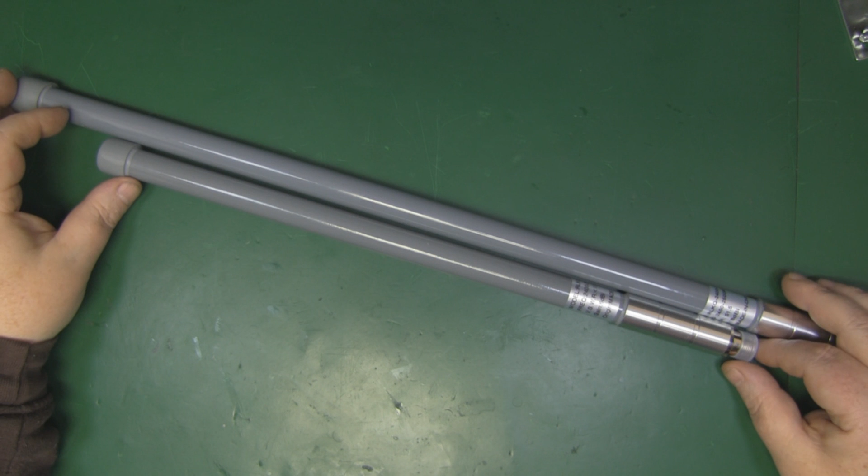So here on the bench, I've got a couple of dipole antennas that I've recently purchased to have a look and test, because I've got a project coming up and I'm going to need quite a few omnidirectional dipole antennas, the type that you can set up outside and not worry about the weather attacking them.

I found these on eBay from a Chinese seller, really a reasonable price. I think the smaller one, which is 6dBi, cost me around £19, and the slightly larger one, 8dBi, cost me around £21. So a very reasonable price. If I were to go to a company like Cisco, they sell dipole antennas very similar to this in dBi and construction, but they can cost well over £100 each.

So I thought it'd be interesting to take a close look at the construction methods they've used, the quality of the construction, and just open them both up to see the difference between a 6dBi dipole and an 8dBi dipole, because there's quite a lot of length difference between the two, the shorter one here and the longer one here.

And you've got this extra length there just to gain an extra 2 dBi in gain. So here's the smaller one, and taking a closer look at the construction, it seems really good quality. You've got the end cap here, and this material feels like fiberglass, not plastic, and you've got plenty of sealant around that top cap, so there's definitely no water going to get into this.

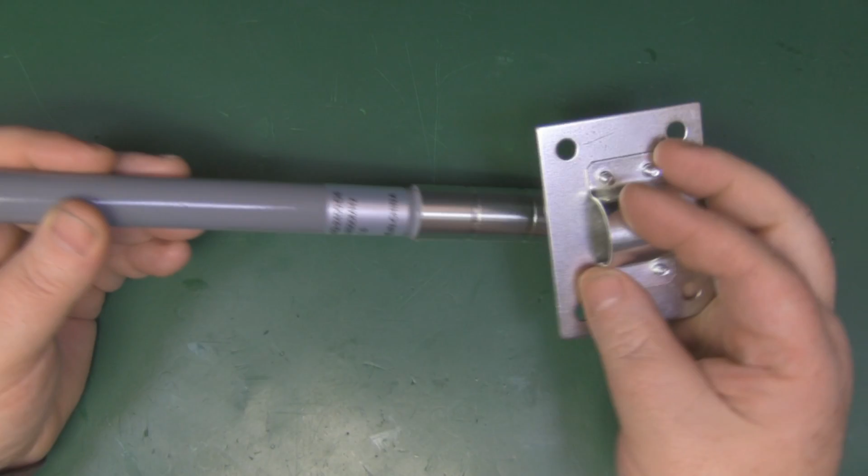And again at the bottom here we've got this metal base, and the clamp goes over that metal base, so you're not putting stresses on this, which I'm presuming is fiberglass or a really tough plastic anyway.

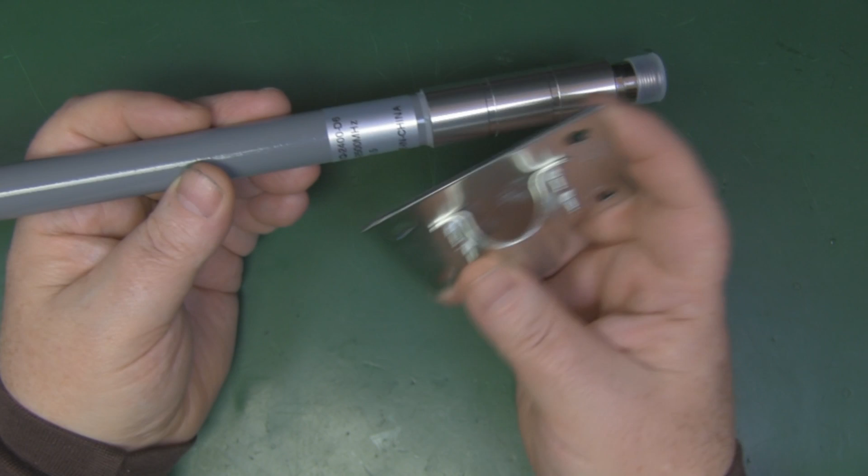So that's designed to go over that, and this will clamp onto either a wall, or I've got some U-bolts with this, it can go on something like a scaffolding pole for instance. But again, the sealant, it's really a nice quality construction there. There's definitely no rain or weathering at all going to penetrate that anytime soon.

And here we've got an N-type connector for the coax, which you will commonly find on professional installations, not SMAs, especially for outside as well.

It's a lot easier to weatherize an N connector than it is an SMA connector, and it looks like it's screwed in, threaded in there, so hopefully I'll be able to get a spanner on there and work it loose so we can pull it out. But there's also some kind of sealant in there as well, so they've gone to the trouble of putting sealant where the threads connect with the N connector, just to make sure there's no water or anything like that going to get in there.

So before I start tearing these down and taking a look on the inside, what I'm going to do is give them a test with the Alfa card just here in the lab, just to see how many access points they pick up, how well they perform with an Alfa card, and we'll have a look at the VSWR as well on the network analyzer.

And the VSWR is printed on the information label on this, and apparently it's a 1.5 VSWR, which is typical for a dipole type antenna.

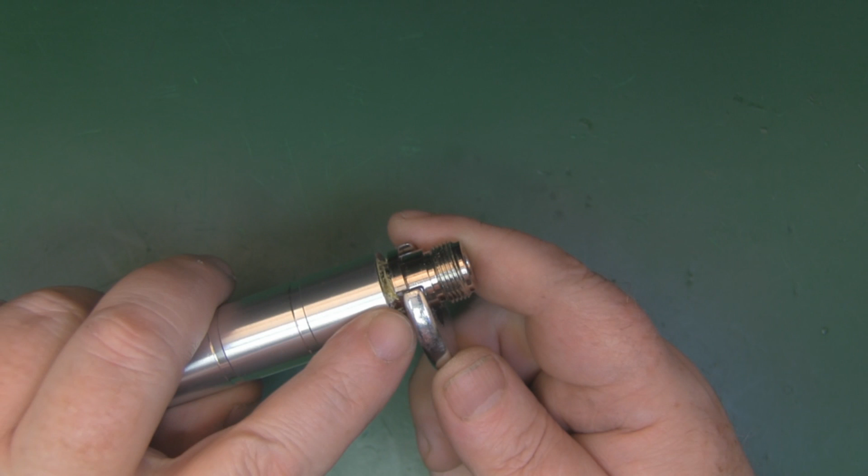So the heat did the trick, so I'm just screwing the rest of it off, but you can see there's some kind of epoxy sealant in there. The heat definitely did the trick on that. That should be good waterproofing as well though.

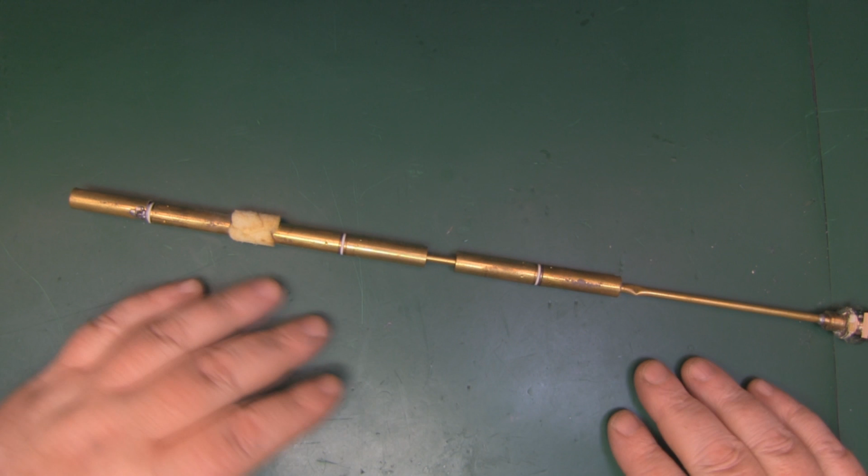So now that we've got it opened up, it's a little bit surprising. I wasn't expecting to find this inside there. It's not your standard dipole design. In fact, it's a collinear design, and you can tell that by these tubes here.

There's a few videos on YouTube, and I've made a couple myself very early on, probably around video number 10, 11 or 12, where you can make a simple collinear antenna just using coax, small sections around 25 to 30mm long, and it's just the way that you arrange them. You can produce a collinear antenna and it will radiate, and it's a pretty effective design as well. So that's what we've got going on here with these brass tubes.

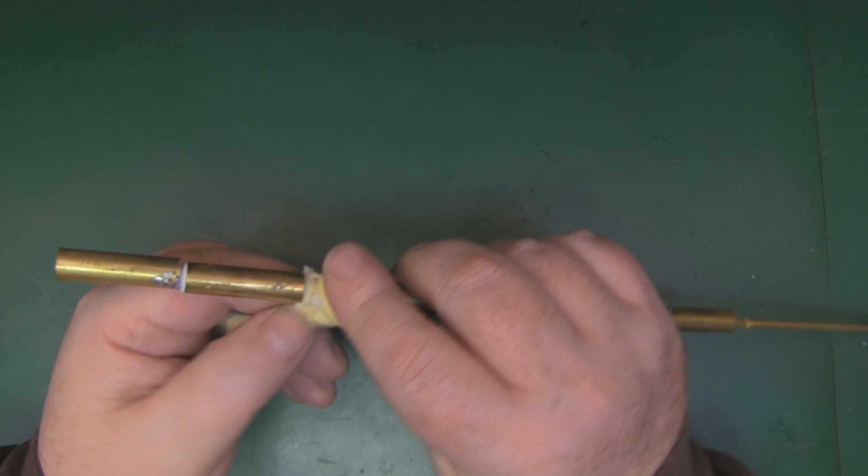So I think the next step is to get the ruler out and start taking some measurements, and I'm just going to remove this packing around here, which is there presumably to stop this rattling against the body of the antenna, but we've got a little tie off there, so I'll just have to cut that away.

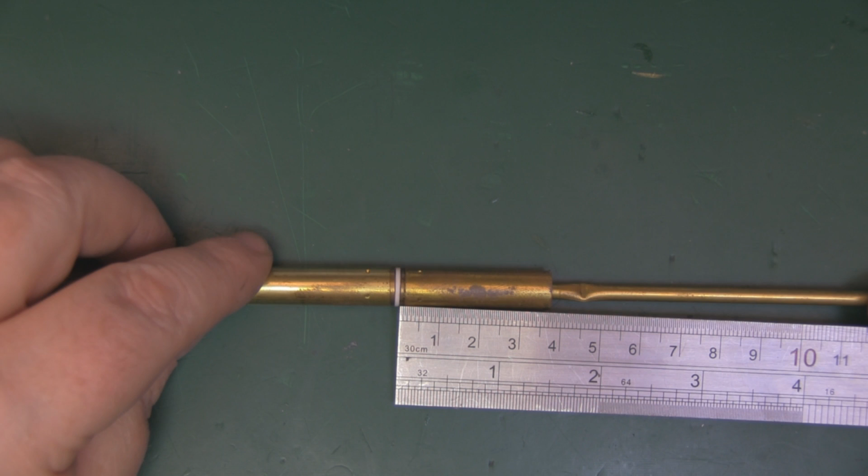So I've measured the tubing with the ruler, and we've got these two here, these two tubes separated by this plastic dielectric in the middle, so they're insulated from each other, and the measurement for these two is coming in at 37mm long, and that's the same with the second two tubes here as well, separated again with this plastic dielectric. But the last two tubes here, these are coming in at 36mm long.

Now I don't know if that's been done on purpose for the design or not, but you can probably see here on the end it's been cut a little bit rough. They haven't put a great deal of effort into cutting the end off there, but these two are definitely 36mm and not 37mm like the other two. So I'm not sure what's going on with the design there.

So what I'm going to do is test this with continuity, just so I can find out which one of these tubes is ground and which one is connected to the signal wire, the center pin wire on the end connector, and then I can draw it out and we can go through the design so I can show you that it is a collinear design.

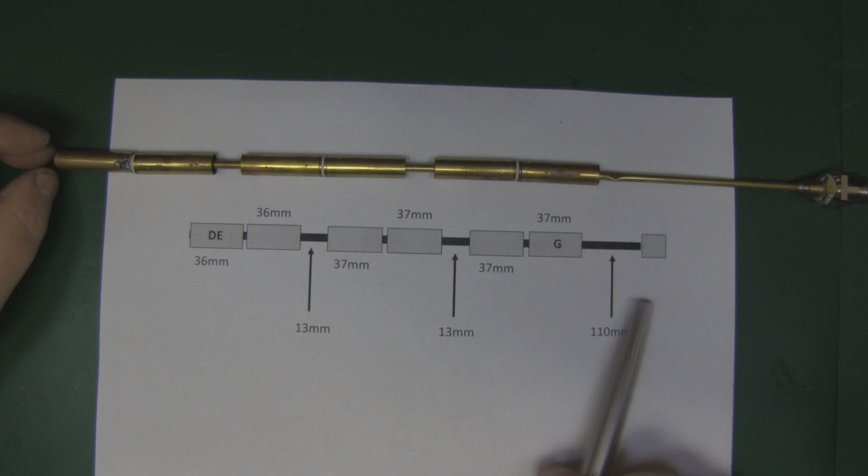So now that I've had time to take a look at this design and try to get an idea of how it works, I've put together this diagram here so you can see more clearly. Basically what we've got is this tube in here, connected to the ground plane, is 110 millimeters long. Now this first section of tubing, the wider tubing, is connected directly to the ground plane on the N-type connector here, so I've put a G there.

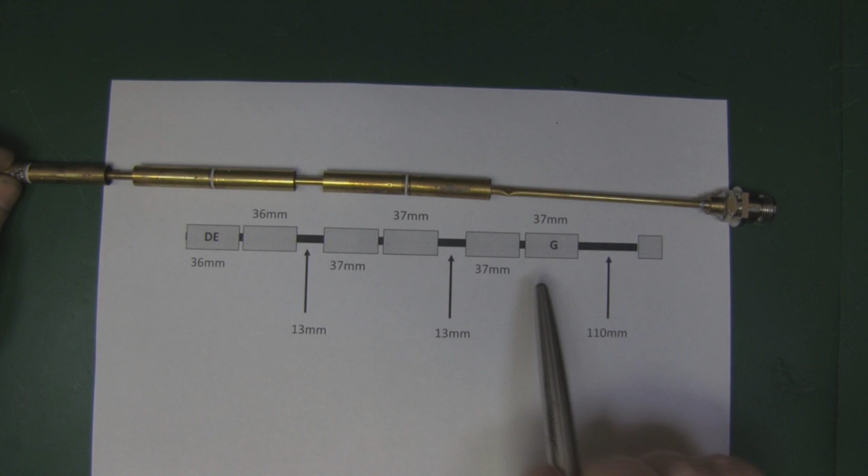Now the next set of these wider tubes are not connected to the ground plane or the driven element, so I can only assume that they're acting a little bit like a parasitic element on a Yagi, for instance. And then the last one here at the end, that is connected directly to the driven element.

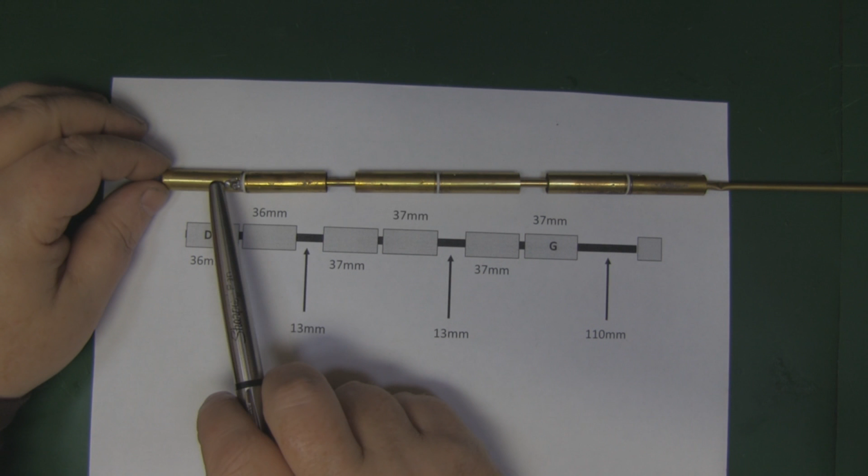That's the center pin on the end connector. Now I've never come across this type of design before. Whether this is typical in the radio ham circles at different frequencies, I don't know. People have asked me previously if I'm a ham radio enthusiast, and I'm not.

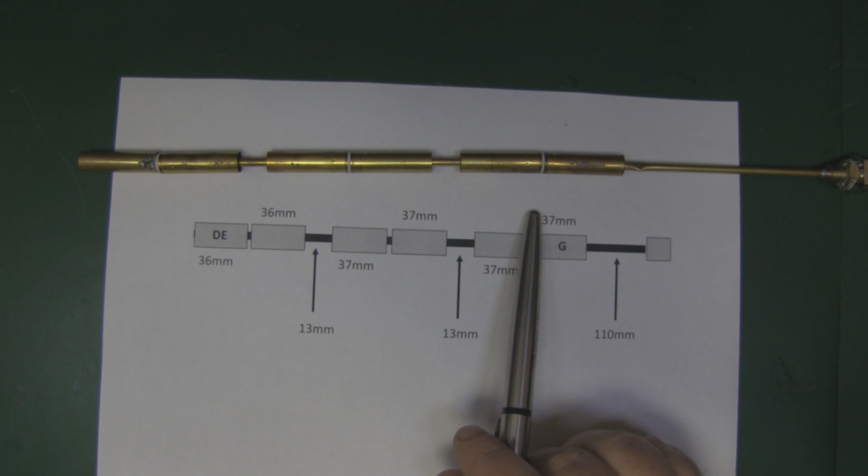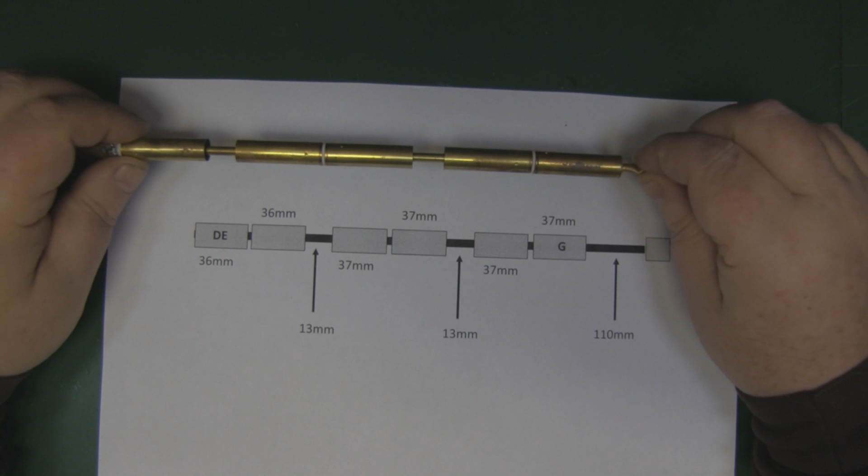I don't have a license, but it's a very intriguing design. If you have come across this before and know what the design is actually called, please let us know. I'm still erring on the side that it's a collinear type design and belongs to the collinear family rather than dipole family.

But I was a little bit concerned that it feels as if it's kind of broken around this area, so I thought maybe these tubes here are designed to be connected to the ground plane, and it's just snapped in the middle there, so it's lost its connection. I've taken the larger one out and taken a look at that, and it hasn't got as much play there, so it's a little bit more rigid.

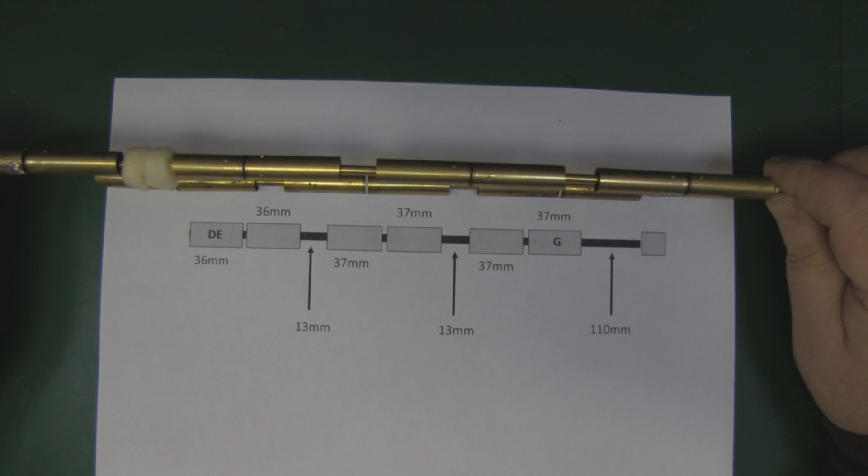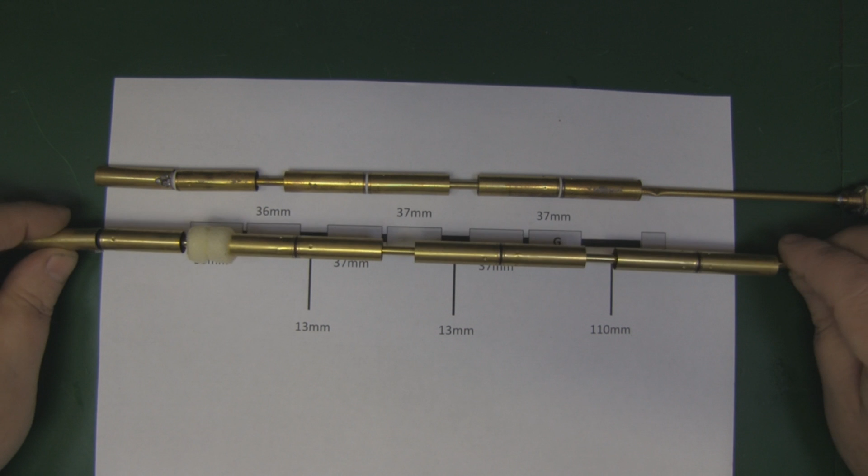Again, the longer one, this one's connected to the ground plane, but this one and this one aren't connected in any way to the ground plane or the main driven element, and this at the end here is connected to the driven element, just like the smaller one. But yeah, I haven't come across a design like this before.

So it does seem an intriguing design, and I am going to order some parts, some brass tubing, to build some prototypes of this so I can have a little play around with this design.

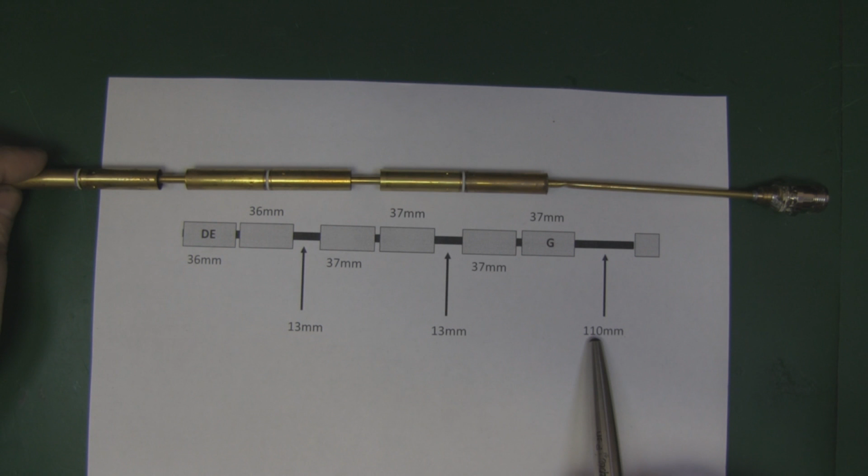But basically it's set out: you have the tubing here, that's 110 millimeters, and then you've got your two longer lengths of tubing here. This one's the ground plane, this one isn't connected to anything. The space between the next piece of tubing is 13 millimeters, and so on here again 13 millimeters.

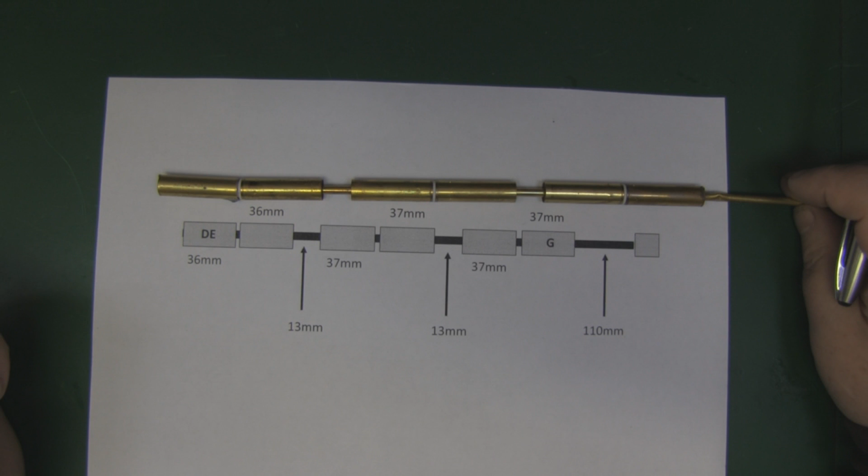And definitely the last two lengths of tubing here, the driven element one as well, they are a millimeter shorter than the others, and I don't know if that's just an error in cutting, but they are definitely 1 millimeter shorter. So now that I've got the longer one opened up, we can compare each design side by side.

The first thing that I notice is the thinner tubing here, the first part of the tubing. On the shorter one it's slightly longer, but on this longer antenna here it's slightly shorter, so I think possibly the thinner tubing doesn't play so much of a crucial role in determining the center frequency of the antenna, but it's certainly shorter on the longer one here.

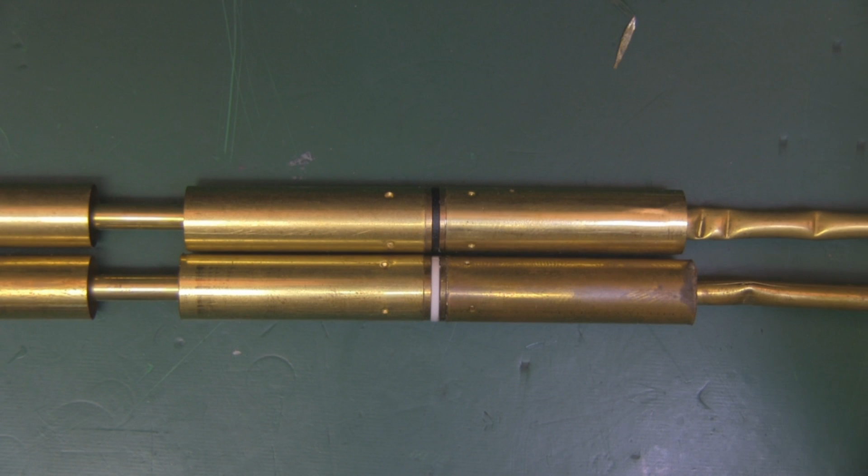If I put the antennas side by side, you can clearly see that the longer 8dB antenna here at the top, the tubing is only 36 millimeters as opposed to the 37 millimeters on the 6dB antenna, so these are a lot shorter. You can physically see the different length there.

So I'm not really sure whether they've had to make it shorter in order to accommodate the extra tubing to make this an 8dB antenna, or it's just an error in cutting, and it's a sloppy poor way of constructing it. They haven't really gone into constructing this with any great accuracy at all.

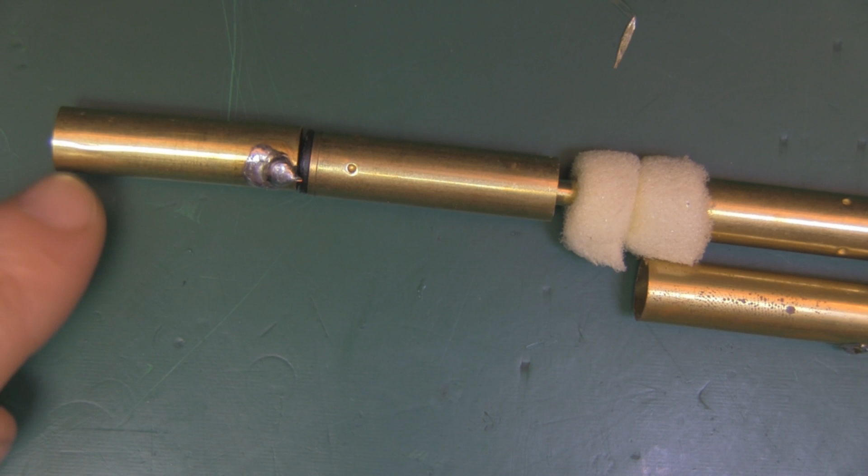But these are definitely 36 millimeters on the 8dB one, so definitely shorter. And the end driven element tubing here is also 36 millimeters, so all these ones are 36 millimeters, quite uniform all the way through the design of the antenna.

But on the 6dB one, these are definitely 36, and the rest of the tubing is 37 millimeters. So I don't know if that's a design consideration in the different dBs of the antenna, or it's just sloppy construction techniques. I don't know. So I decided the best way to start deconstructing this is from the top down.

I've got the main driven element tubing desoldered here. You can see it's just a slit cut in the tubing that folds over this piece of copper wire here that's connected to the center pin on the end connector.

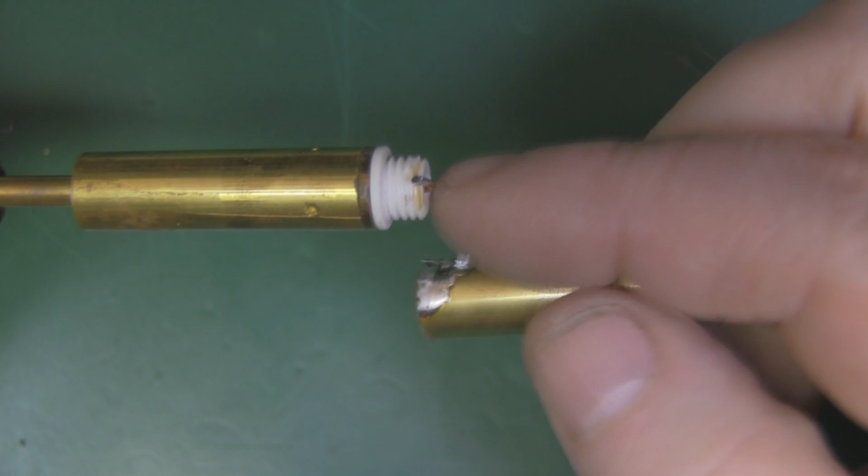But we've got these spacings here, these plastic spacings, and they've got threads on, and these aren't threaded into the tubing, so I think these have been repurposed from something else. And indeed, in the longer one, we've got some black spacings here, so definitely different parts have been used in the construction of these antennas.

So as I say, probably repurposed, because there's no threads making contact with this tubing here, and certainly no threading inside this tubing to screw it down onto that. So it's not looking good. Also, this is a solid piece of copper wire, I think, and not any kind of coax in any way, so it's probably not going to be 50 ohms either.

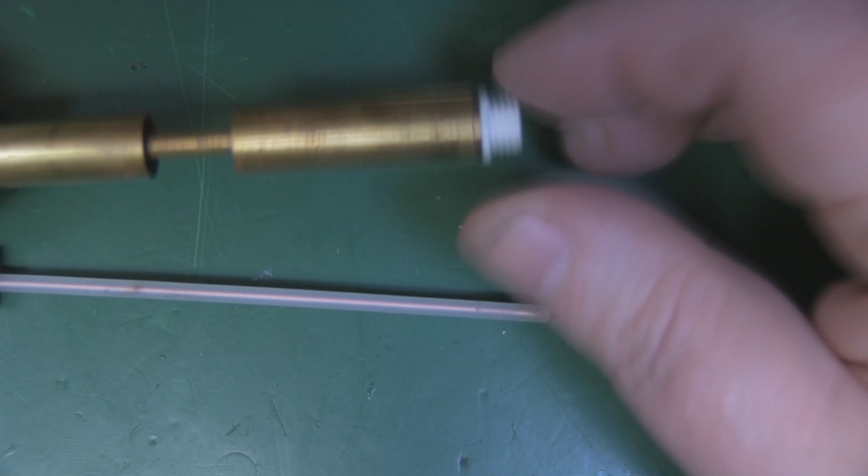So I may have jumped the gun a little bit, because these threads are threaded into these lengths of tubing here, and it seems to be quite modular.

I've just unscrewed this one from this middle set of tubes here, and that's how they're getting the isolation. These two tubes here are connected to each other through this brass tubing, so if you get continuity, you do get continuity from these two tubes here. Each set of two tubes is independent from each other, and this ground plane one is the only one that's connected to the ground plane. This one is isolated, so it's quite a modular design.

Now that we can open it up and take a look at the center part of the antenna, this looks like really cheap coax. It's got this dielectric around it that kind of resembles TV coax wire, so I'd say it's probably not 50 ohms. It's probably just copper wire they've got lying around the factory. I haven't seen a design like this before.

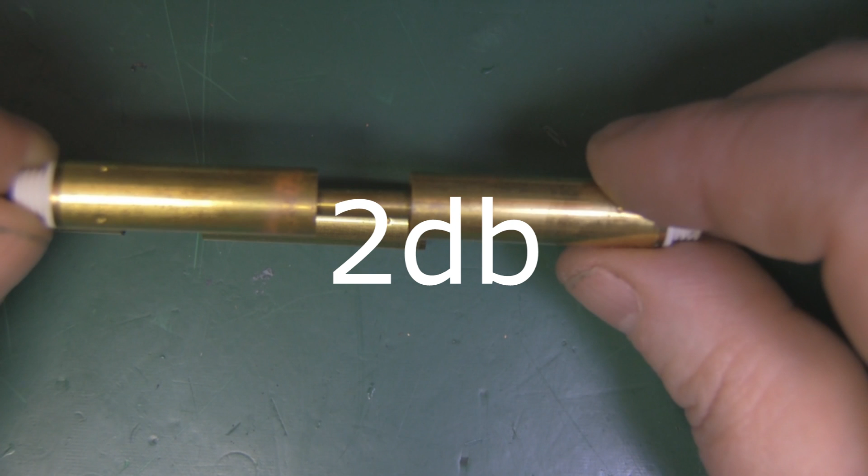Each part is modular, so effectively, if you purchased a few of these parts, you could make antennas as long or as short as you wanted, with the dB range. Sticking an extra pair like this in line with the antenna, over the shorter one, does give you that extra 2 dB of gain that they claim. If you do know what kind of design this antenna is, please let us know in the comments, because I'm unsure, and I've had another quick look and I can't find any reference to this design at all.

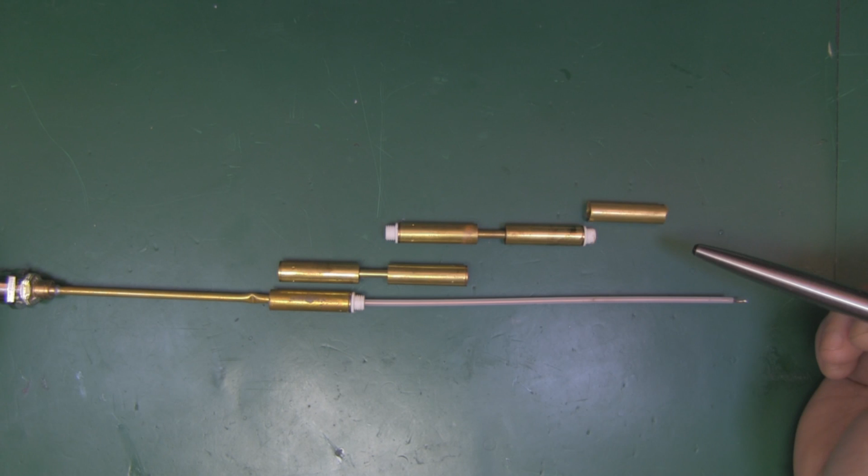Now that the antenna's deconstructed, we can really see how this is put together. Starting at the bottom, this brass tubing is the ground plane, connected to this first tubing, and then we've got these two sets of tubes here, which are independent of each other. They're not connected in any way to the rest of the antenna, but they are connected in pairs, and they're just screwed on top of these plastic threaded bits here that also act as isolation. Then we've got the final tube here, connected to the copper wire at the top, which is our driven element. So a really modular design.

When you've got the bottom half of this soldered up, it probably doesn't take any time at all to construct the rest of the antenna. But again, the quality isn't all that. There's small cracks in the tubing, some of the tubing is just cut off quite roughly, and it's got saw marks on there. They haven't really taken any effort to file that down and make it a little bit neater.

Also the measurements of these tubes - these ones are 37mm, but on the longer range one, the 8dB one, these are definitely cut off at 36mm. So there's inconsistency over the measurement there, unless you've got to do that because adding an extra pair of these tubings will affect the measurements of the antenna. I don't know, which is a good reason to get some parts in and have a play around with this design.